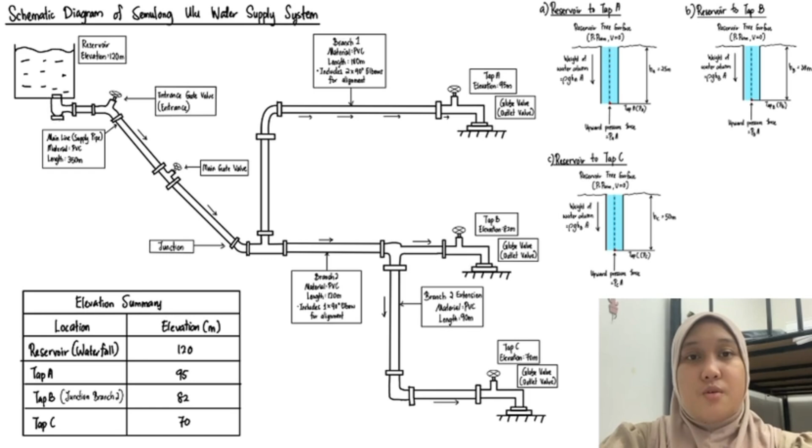Currently, the village relies on an informal water collection system that becomes unreliable, particularly during the dry season when water demand is highest. The community consists of 3 longhouses supplied through 3 designated tap points located at different elevations. If the available pressure is too low, residents may experience insufficient water flow for basic daily activities such as cooking, cleaning, and personal hygiene. To address this, we evaluated a gravity-fed water supply system using a hilltop reservoir located at an elevation of 120 meters. The proposed network consists of a main pipeline that splits into 2 branches, supplying tap A, tap B, and tap C.

Our first assessment was the static pressure audit. This analysis determines the maximum pressure in the system when water is not flowing. The highest pressure occurs at tap C because it is located at the lowest elevation, which is 70 meters above sea level. This represents the most critical location for pipe safety because excessive pressure could potentially cause pipe failure. Based on our calculations, the static pressure remains within the allowable pressure rating of the selected PVC pipes, indicating that the system can operate safely without risk of bursting.

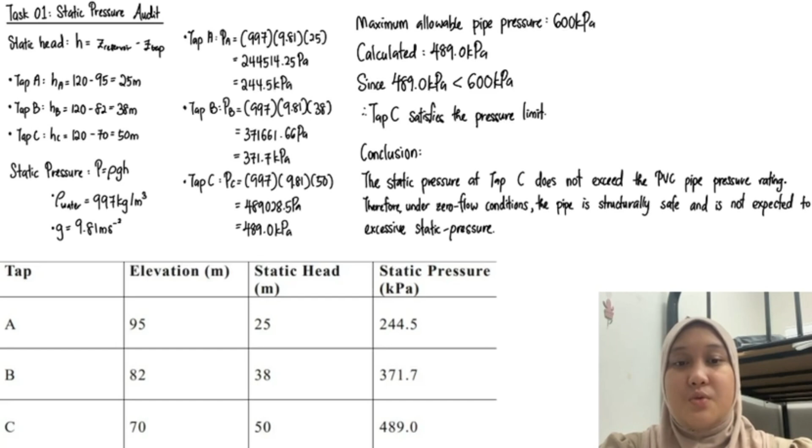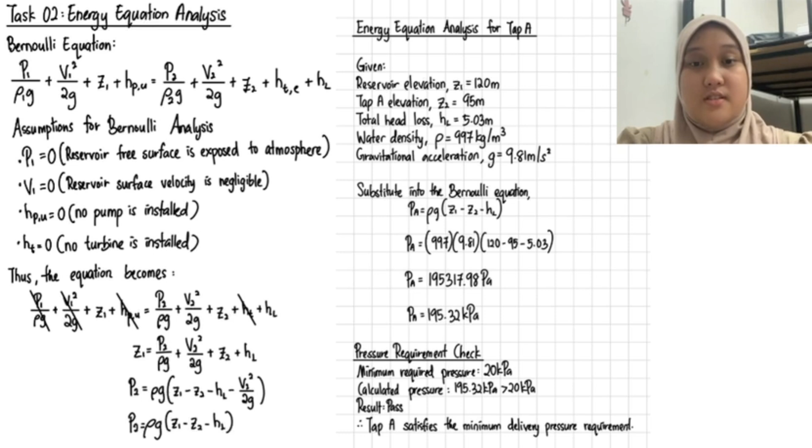Next, we applied the extended Bernoulli equation to evaluate the pressure available when water is flowing under peak demand conditions. Using the head losses calculated from the Darcy-Weisbach analysis, we found that the delivery pressure at tap A is 195.3 kilopascals, at tap B is 325.5 kilopascals, and tap C is 432.4 kilopascals. Most importantly, even the most constrained tap point, which is tap A, still received approximately 195 kilopascals of pressure. This is significantly higher than the minimum required pressure of 20 kilopascals. Therefore, all 3 tap points are capable of supplying water adequately during simultaneous operation.

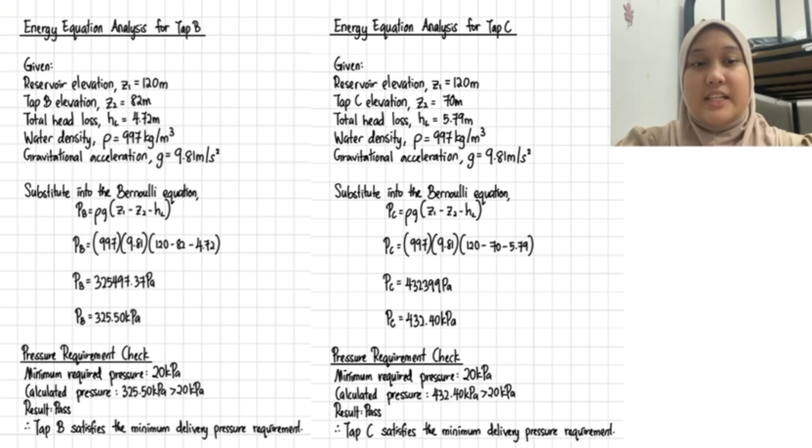These findings confirm that the proposed gravity-fed system is hydraulically feasible and capable of meeting the needs of the Semulong Ulu community.

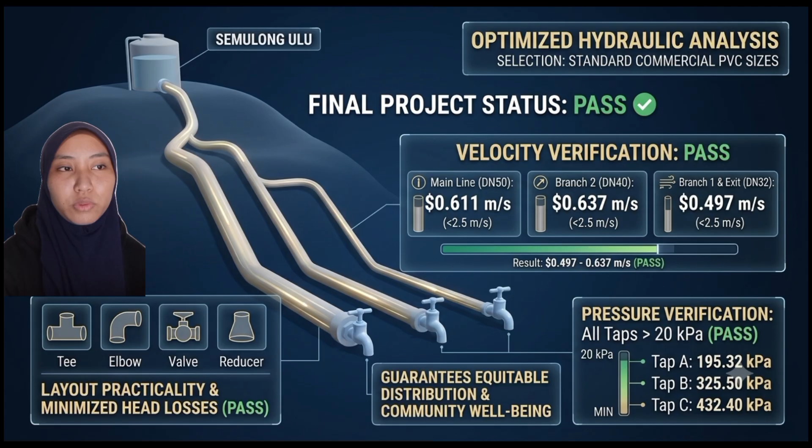Next, using the extended Bernoulli and Darcy-Weisbach equations, we evaluated the system's energy losses. As a result, our final delivery pressures successfully passed the project constraints. Tap A receives 195.32 kPa, Tap B receives 325.50 kPa, and Tap C receives 432.40 kPa, all comfortably exceeding the minimum 20 kPa requirement. In conclusion, this configuration guarantees an equitable, safe, and fully compliant water distribution network for the village.

The final design uses commercially available PVC pipes consisting of a DN50 main line, a DN40 branch 2, and DN32 pipes for branch 1 and the extension branch to tap C. Starting from the reservoir, the main pipeline has a length of 350 meters and uses a DN50 pipe. Since this section carries the total flow from the reservoir to the junction, a large diameter was selected to reduce friction losses and maintain efficient flow conditions.

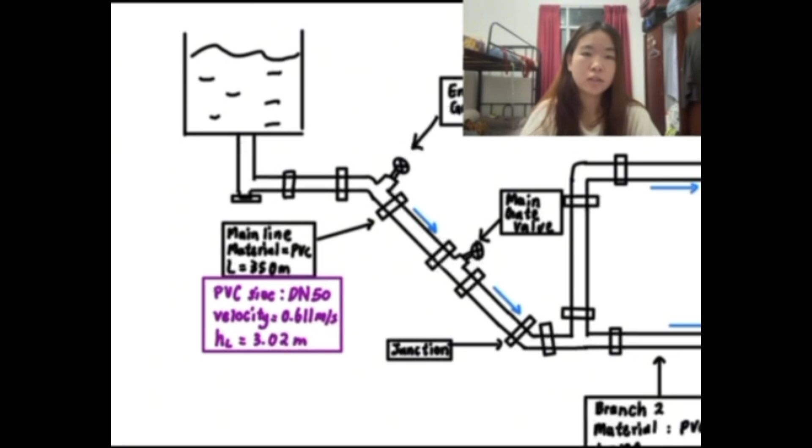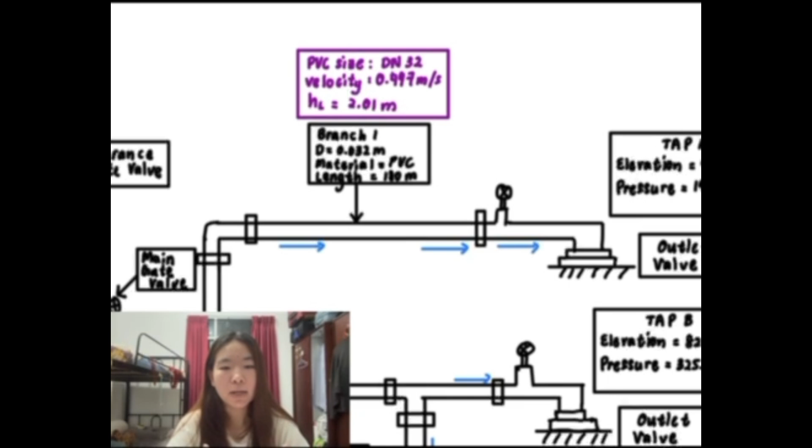The calculated velocity in the main line is 0.611 meters per second, with a head loss of 3.02 meters, both within acceptable design limits. Now, moving on to branch 1, a DN32 pipe was selected over a length of 180 meters. The calculated velocity is 0.497 meters per second, while the head loss is 2.01 meters. As a result, Tap A receives a delivery pressure of 195.32 kilopascals, significantly higher than the minimum required pressure of 20 kilopascals.

Now, moving on to branch 2, which uses a DN40 pipe with a length of 120 meters. Hydraulic analysis produced a velocity of 0.637 meters per second and a head loss of only 0.23 meters. The larger diameter helps maintain adequate pressure further downstream in the network.

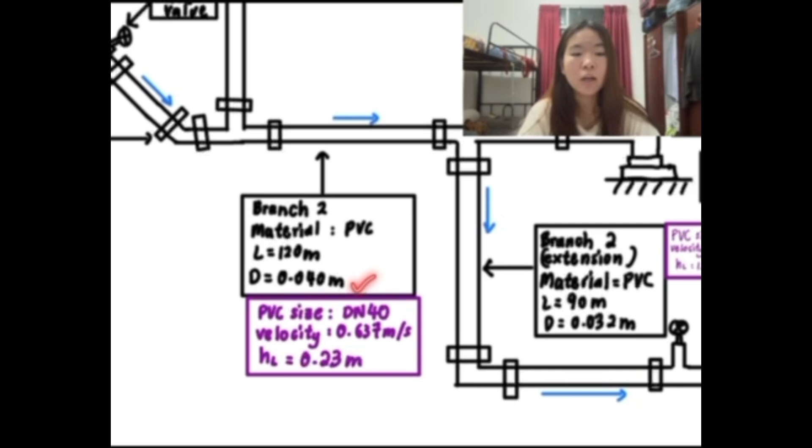Now, lastly, we will look at the extension branch to Tap C. This extension branch uses a DN32 pipe over a distance of 90 meters. The velocity remains at 0.497 meters per second with a head loss of 1.07 meters. This section delivers water to Tap C with a pressure of 432.4 kilopascals. Tap C is the lowest elevation point in the system and therefore experiences the highest pressure.

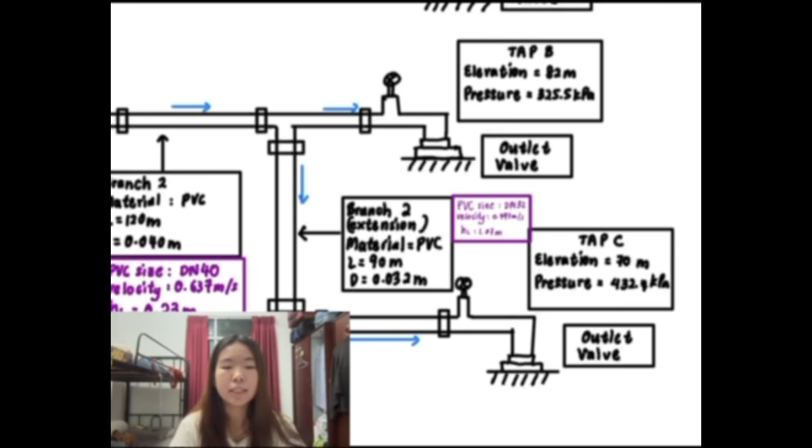For this reason, a static pressure check was performed. The maximum static pressure at Tap C was calculated as 488.9 kilopascals, which remains below the allowable PVC pipe pressure limit of 600 kilopascals. Therefore, the selected pipe sizes can safely withstand the operating conditions without risk of structural failure.

Beyond the technical requirements, this project addresses the challenges currently faced by the Semulong Ulu community due to inadequate water access. In highland villages, residents may need to spend significant time and effort obtaining water from alternative sources, particularly during periods of low supply. This can affect daily activities, reduce productivity, and make it more difficult to maintain proper hygiene practices. A reliable gravity-fed water supply reduces these burdens by providing consistent access to water at all designated tap points.

By ensuring adequate pressure throughout the network, the proposed system supports better living conditions, improved sanitation, and more equitable water access for all households within the village.

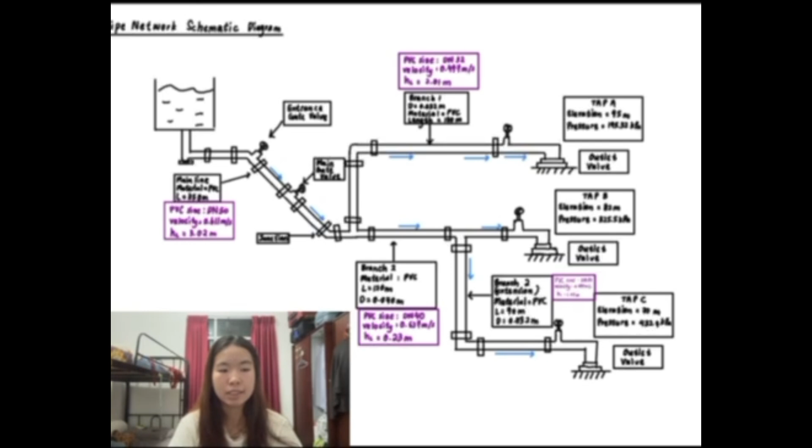In conclusion, the proposed design satisfies all velocity, pressure, and structural safety requirements while remaining practical and cost-effective for rural implementation. To the panel, we respectfully recommend the adoption of this gravity-fed water supply system using DN50, DN40, and DN32 PVC pipelines, as it provides a safe, reliable, and sustainable solution for the long-term water needs of the Semulong Ulu community. Thank you.